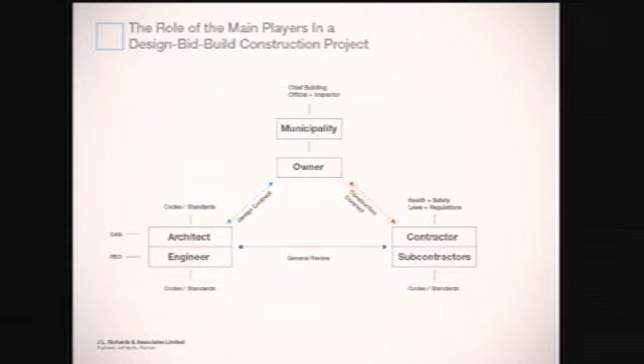Sorry. Yes, thank you. This is a depiction of the arrangement between the various parties on a construction project. We have at the center of everything the owner. This is the person that wishes to construct a project and has his own financing in place to build it.

He will consult with the municipality through the chief building officials and the building controls department to make sure that the zoning and the site plan control and building permit aspects of his application are in order and in compliance with the Ontario Building Code.

The owner will usually, in a project of this nature, contract with an architect, an engineer, or a group of engineers to prepare construction documents consisting of drawings and specifications to describe how the building needs to be built and the various qualities and installation methods for the materials.

The architect traditionally has been the prime consultant in this arrangement and responsible for the architectural design and coordination of the other engineering consultants and surveyors and planners that might be needed on a project. Architects are expected to operate in accordance with the guidelines and practices dictated by the Ontario Association of Architects, and engineers practice under the regulations and guidelines provided by the Professional Engineers of Ontario.

Once the drawings, or contract documents as they're referred to, are completed, the owner, or the architect on his behalf, will advertise for tenders from general contractors, or they will invite tenders from selected contractors that they are happy with and who have come recommended to them.

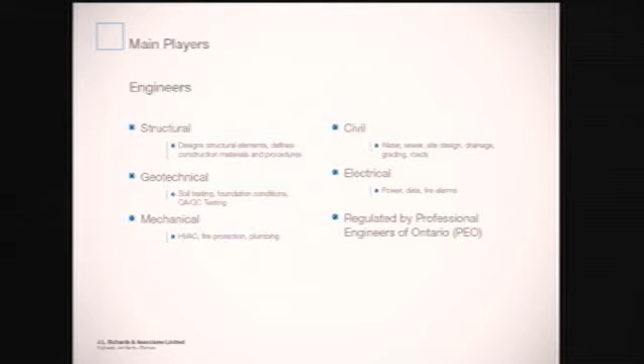You would retain a geotechnical engineer, usually on a project, to define where rock might be or what the founding conditions might be at the proposed foundation elevation, to define bearing pressures, provide lateral soil pressure factors and importance factors relative to seismic design. Usually this involves drilling or test pits to actually physically sample the soil. They will also be usually required to do some quality assurance, quality control, QA/QC, testing on various elements during the construction process.

You have mechanical engineers responsible for the heating, ventilating, and air conditioning systems, the fire protection, plumbing, building controls. You have electrical engineers for the power, lighting, data, fire alarm systems. Civil engineers will design the water and sewer services to the building, the drainage systems and the site grading and the roads and access to the local streets. And all of these professionals, if they're professional engineers, are regulated by the Professional Engineers of Ontario. Next, please.

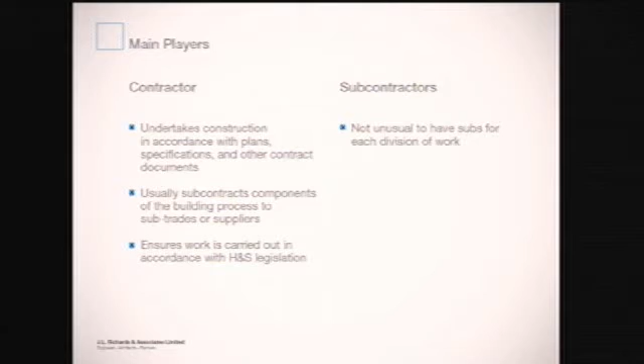Moving to the contractor. Contractor is in this case, in the traditional sense, a general contractor who undertakes the construction in accordance with the plans, the specifications, and other contract documents that he has actually signed a physical contract with the owner to perform. He will usually subcontract a great number of components of the building process to subtrades or suppliers, and is responsible essentially to act as a coordinator or integrator of all of these trades and suppliers into a whole, complete working building.

And it's very much a responsibility of the contractor, the general contractor, to ensure that the work is carried out in accordance with health and safety regulations. And his subcontractors, as I mentioned, can vary. Probably 15 or 16 different subcontractors on a large project, varying from painting, drywall, masonry, concrete forming, reinforcing steel placement, structural steel supply and fabrication.

Oh, I'm sorry. Get carried away. If you would bear in mind, Mr. Craig, that not only we have live transcription, but we also have translation, and that's true, in an area which is very technical, and I think you would be doing both these ladies a favor by just slowing down a bit, if you could do that, please. I will. Get carried away.

Various subtrades, such as concrete, reinforcing steel, structural steel supply, fabrication, erection, masonry, painting, roofing and waterproofing, electrical and mechanical, just all of the various pieces of a building that require specialty subtrades. Next, please.

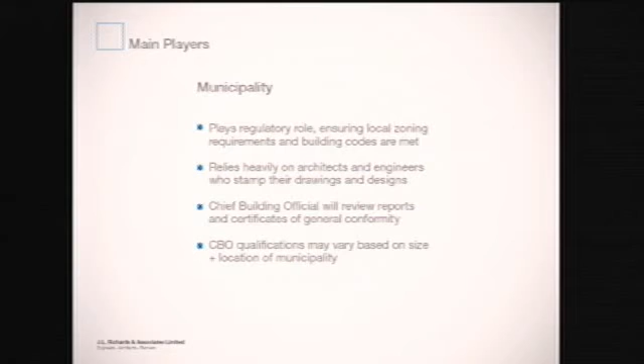The role of the municipality, again. Yes, the municipality plays a regulatory role under the Ontario Building Code. They ensure that the local zoning requirements and the building codes are met through the site plan control and building permit application process. The Building Controls Department usually relies quite heavily on the architects and the engineers who stamp their drawings and design and take professional responsibility for them meeting the applicable code.

The chief building official will review reports and certificates of general conformity which are provided by the professionals at the end of construction. And one thing to note is that chief building official qualifications may vary based on the size and the location of a municipality. It's not unusual for smaller or more remote municipalities to find it difficult to afford and attract professional engineers or architects to act in that capacity on their behalf, and hence they often don't have registered professionals on staff.

In that case, they can decide on their own whether they have the appropriate qualifications and feel comfortable with reviewing and approving the drawings, or engaging other professionals to assist them. Next, please.

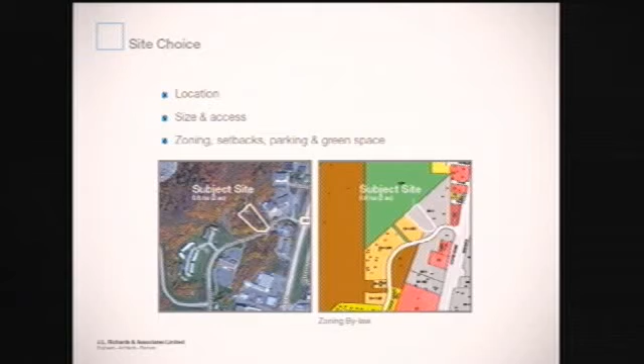The construction project itself begins with the choice of a site. It all comes down to location. An owner may have a piece of land that he wishes to develop a particular building on for whatever purpose, or he may have an idea for a building or a process that he wants to construct, and he will search for several sites. So it comes down to the location.

The size of the site will have a bearing on what sort of building is on it, and the access to the various services and roads and transportation networks if there's a product involved or deliveries to and from it. Each site has to be analyzed to determine what its zoning is, what the required setbacks are, the amount of parking that's required, the amount of green space, and the various things that are set out usually in the municipal ordinances and zoning bylaws. Next, please.

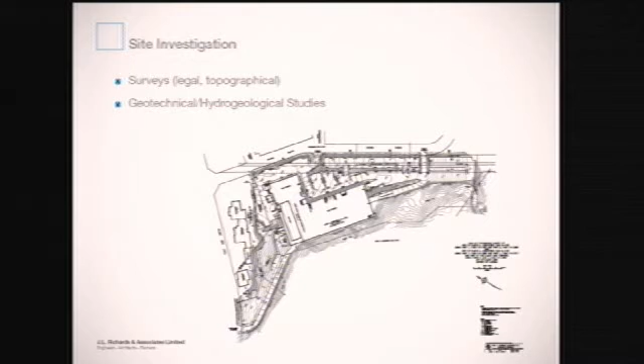Once the site is chosen, the next phase in the construction process is the site investigation. Usually it involves a legal survey to determine property boundaries and any impediments to that, any encroachments or any other liens or anything on the property that would render it unsuitable for the proposed construction project.

Then you would get into a topographical survey, which would define the various elevations and features on the site, so that the designers can appropriately provide grading, drainage, and foundation elevations suitably, and establish the floor elevations to suit the purpose of the building. Then you would move on to geotechnical studies to determine where the founding elements will bear, whether it's on soil or on rock, and if the rock varies, what the depth to the rock is.

He would work in consultation with the structural engineer to determine the structural engineer's preferred system of foundation and the various parameters such as allowable bearing capacity or depth of piles to found the building on. Sometimes you engage hydrogeological studies to determine groundwater levels, whether there's contaminant transport underground in the water table, or other features that a hydrogeological consultant might address.

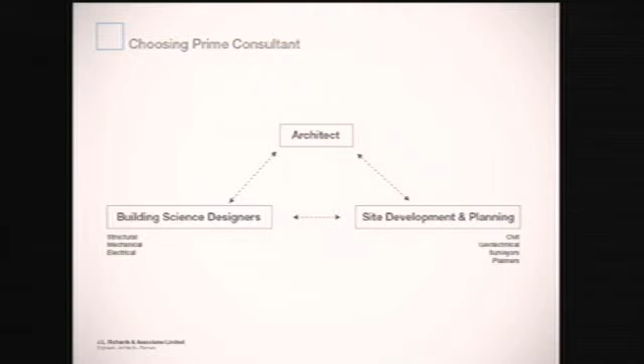We come back to the triangle with the architect acting as prime consultant. In this instance, the architect would engage what we term now as building science designers. The three major disciplines are structural, mechanical, and electrical. Structural engineer for the building frame and how loads are carried and the building is structured. Mechanical and electrical, as described, for the HVAC, plumbing systems, and the various electrical, power, and lighting systems.

On the site side, the site development and planning might involve civil engineers, or municipal engineers as they're sometimes referred to, geotechnical engineers, surveyors, and planners.

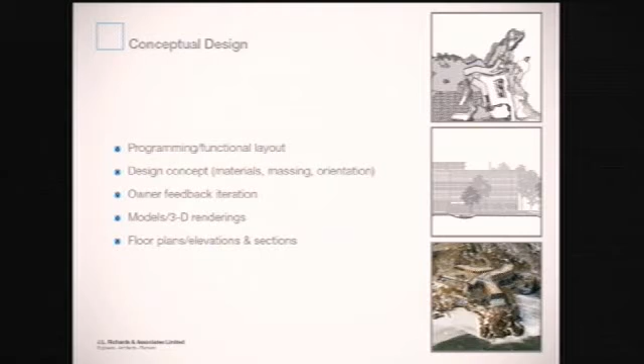The design process begins with what we term the conceptual design. The architect comes up with a programming and functional layout for the building, a design concept with which he will select and recommend to the owner various materials, massing of the building, floor-to-floor heights, actual dimensions, and orientation on the site. This will be discussed in detail with the owner and preliminary budget estimates made. Usually there's one or two, maybe more concepts developed at this stage.

They might include a model of the building or a 3D rendering. In the older days, back in the 70s and 80s, it would probably be a hand-drawn perspective of the building from various orientation points. So this is the first phase in the conceptual design—now you have the design team together to come up with a conceptual design.

There's one shown on the right side of this page. Since we had them handy, those are some conceptual drawings and a model of the Living with Lakes building that our firm did in Sudbury at Laurentian University. It was an award-winning project, so we're proud of it.

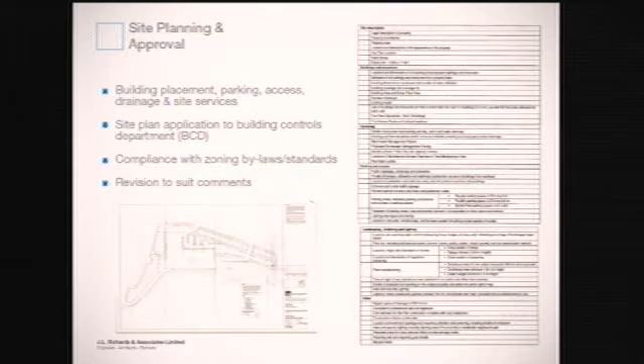Then you're moving on to site planning and approval. This process involves making sure a site plan drawing is prepared, which shows the building placement, parking, access, drainage, and site services. A site plan application to the Building Controls Department is made on behalf of the owner, with the owner's full knowledge, and it's reviewed for compliance with zoning bylaws and standards in effect at the time. As the Building Controls Department finds differences from their local bylaws or the building code, they'll mention these to the design team, and there will be appropriate revisions. On the right is a typical building site plan control checklist from a municipality indicating the various aspects that need to be ensured as being submitted and meeting requirements.

So once you've arrived at the concept design, what's the next phase? Site plan approval—we've done the conceptual design, submitted for site plan control approval, and now you move into the detailed design.

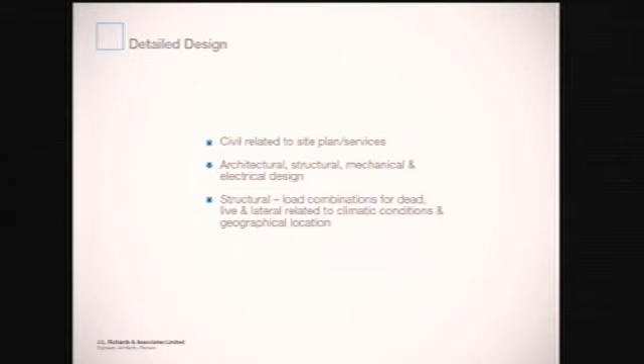The detailed design would involve civil engineering and municipal engineering for the site plan and services - the roads, grading, parking, and stormwater management, which is certainly an important aspect these days. The engineers and architect would design their various systems. The architect handles all the building finishes and building envelope.

Materials and selection systems. The structural engineers address the structure itself, and the mechanical electrical design for the various systems described earlier. The structural engineer has to pay attention to various prescribed load combinations for the dead load, the live load, and related climatic conditions and geographical location, which are prescribed in the code.

And loads will be a subject we'll hear evidence about through the course of this. In terms of how you arrive at these loads, let's move to the next slide for illustration.

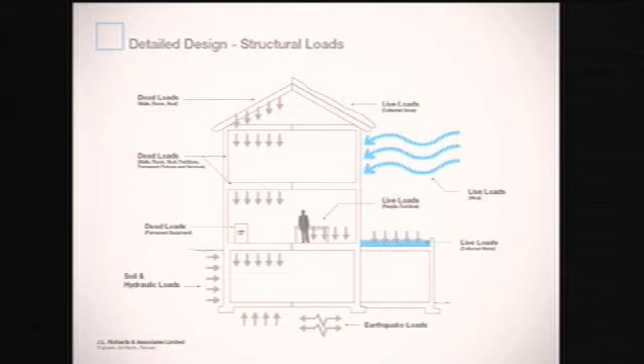This is a pictorial indication of some of the nature of the loads. You have dead loads from the walls, the floors, and the roof of the building itself. You also have permanent partitions and fixtures and services that are embedded or permanently attached to the structure, and the structural engineer will estimate the amount of that weight or load on the structure. You have permanent equipment that will exert heavier loads in certain areas that have to be taken into account.

At the foundation level, you will have soil and hydraulic loads - water pressure on basement walls if they're not drained, or you just can't drain them effectively - and the soil itself exerts lateral pressure on the wall.

In terms of live loads, you have those such as snow, which in the Northern Ontario area we know all about. Live loads from wind exert lateral pressure on the walls and roof, and uplift in some cases depending on the nature of the wind. You might have loads for collected water, unintentional collected water on a roof, or a swimming pool that's built in.

And you have lateral loads related to earthquake, although in Northern Ontario in general that's of lesser concern because it's a lower seismic activity area. Then you have live loads from people and movable furniture.

By what route do you arrive at what the wind loads and snow loads are? Where do you get that information? The Ontario Building Code is very good for this.

In both the 1975 and 2006 editions, there is a complete list of climatic conditions and wind pressures, earthquake and seismic factors, snow loads, ground snow loads, and then the design portion of the code, Part 4, dictates to the structural engineer how he uses these loads and the factors he works into his load combinations.

During contract administration, there is review of quality assurance and quality control by the design team, either through an agent or personally. There would be a testing program for various materials — concrete, and sometimes sections of structural steel are tested to make sure they have the proper yield strength. You might have an inspection of the roofing process to make sure it's applied correctly. It's a unique science in many respects. The designers would set out in their specifications which materials need testing, the nature of the testing, and the codes to which the tests must comply. There's a professional obligation to ensure general compliance or conformity with the design documents, and this general review process is required by the Ontario Building Code.

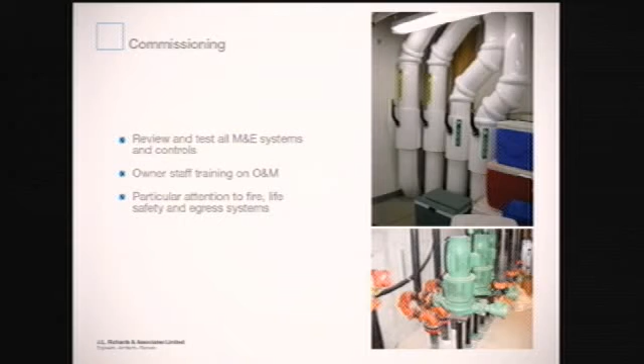As you move towards the end of the construction process, you move into what we term the commissioning phase. It's generally focused to a large extent on the review of the mechanical and electrical systems and their controls, to make sure they're operating correctly and will provide power, heat, light, and comfort to the occupants. Usually the commissioning process involves owner and staff training and the provision of operations and maintenance manuals to guide future maintenance of the building. There's also particular attention paid to fire and life safety and egress systems at this time.

Is the commissioning done before or after substantial completion? It's usually done just before substantial completion. It's usually one of the elements the designer would want to have in his pocket, to make sure the air systems are balanced properly and all the equipment is working, because one of the tenets of substantial performance is that the building is suitable for its intended use and purpose. So it's most designers' position that unless all of the life safety and occupant comfort systems are working properly, it's not ready for its intended use.

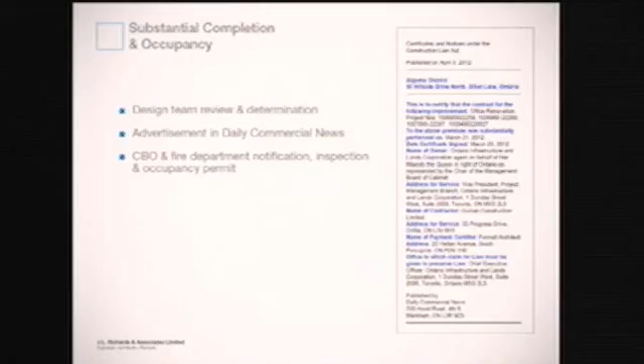At substantial completion, or substantial performance as it's now referred to, the design team will inspect the building thoroughly to determine what deficiencies there are and how much is left to be done, and make their professional determination as to whether the building is ready to be accepted as substantially performed.

If it is, there's a requirement in the Construction Lien Act to advertise this substantial performance in the Daily Commercial News, so that any suppliers or subcontractors who might have lien rights know when they expire, and that they have to get their claims in before the expiry of that date.

Following that, the Building Controls Department, or the Chief Building Official, and the Fire Department would be notified that the building is ready for occupancy in the opinion of the contractor and the professionals, and they would inspect the facility, determine whether it meets the requirements that they've laid out, and if it does, they'll issue an occupancy permit. If it doesn't, corrective measures are taken.

Thank you. On the right is a certificate of substantial completion that you mentioned, typically published. Yes. So Quinnen Construction was not any part of the construction of the mall? Absolutely not. This is typical. This is a public record that we just pulled off of the Daily Commercial News. It just happened to be one in Elliot Lake. Thank you.

That signifies really the end of the building construction and commissioning and turnover process. The owner now takes responsibility for the building and for its ongoing maintenance and review. There's normal maintenance required on all building systems. Some are more cogent than others. The architectural and the structural systems, in my opinion, their maintenance, although it's important, is often ignored until problems occur.

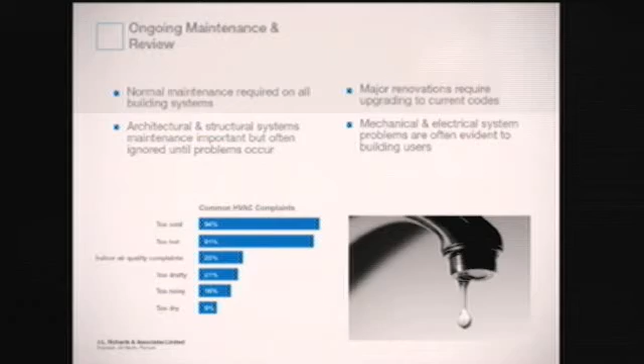You don't pay attention to your roof until it leaks. You don't think about the caulking until you've got a seepage around a window. You don't think about a structural problem until something deflects or breaks or moves, or you feel some vibration and some undue stress. So it's the old adage of out of sight, out of mind in many respects.

There's a note here that major renovations require upgrading to current codes. If there's a significant renovation to an existing building that was designed under a previous code, that portion, or if it's extensive enough, all of the building must be upgraded to current code requirements.

But the big reason that mechanical and electrical systems receive most of the maintenance and repair attention is simply because they affect users. They're obvious to the building users. If you don't have enough heat, or if you've got no power, or the toilet doesn't flush, somebody gets upset, there's a complaint, and usually the building maintenance is taken care of. Next, please.

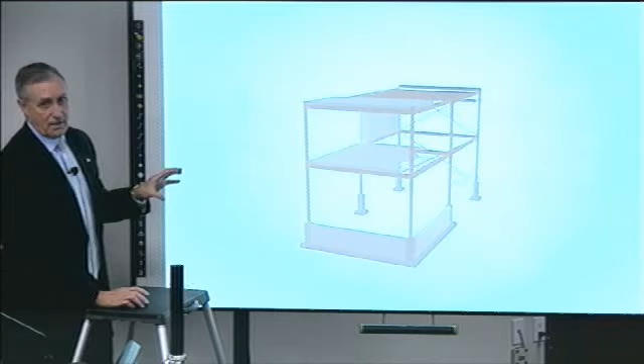Mr. Commissioner, I think Mr. Craig's now set up to show the structural elements and the graphic. Thank you. Am I live here? Okay. This is an interactive graphic model that we have prepared just to illustrate the various components of a typical structural steel frame construction. It's not the Algo Centre Mall by any means, but I will just go through and show you some of the various terminology and members that we use in the structural engineering profession.

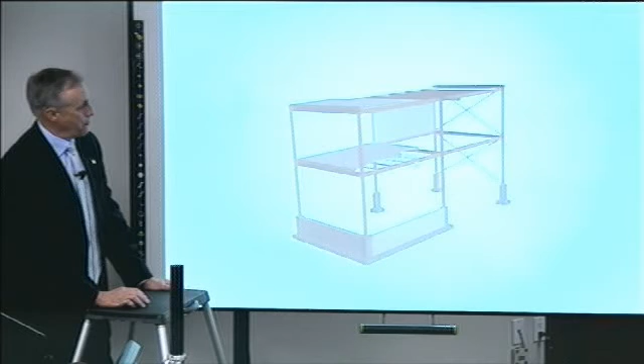This is, in its entirety, a structural steel frame. These are reinforced concrete piers with spread footings.

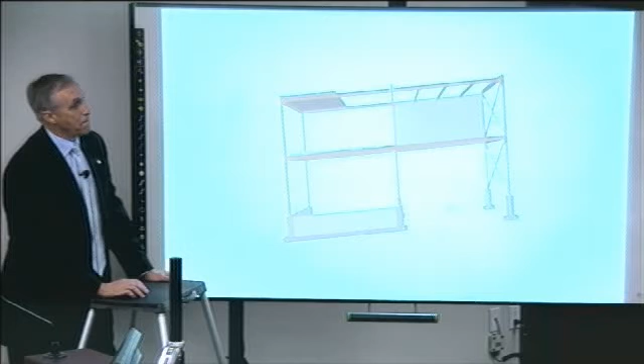Can I just interrupt you for a moment? I'm sorry, Mr. Craig. I'm not seeing the transcript being produced on my screen. I don't know if it's the same for everybody else. Have a look now. Is everybody else getting the transcript live, or is it just yourself? It is coming through here, yeah. Okay, let me try again, sorry.

No. Still with it. If everybody else is getting it, that's fine. It's not the end of the world for me, but I thought it might be a general problem. Go ahead then, please. Sorry, Mr.

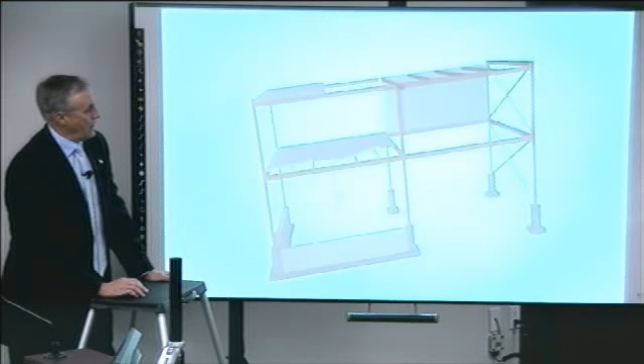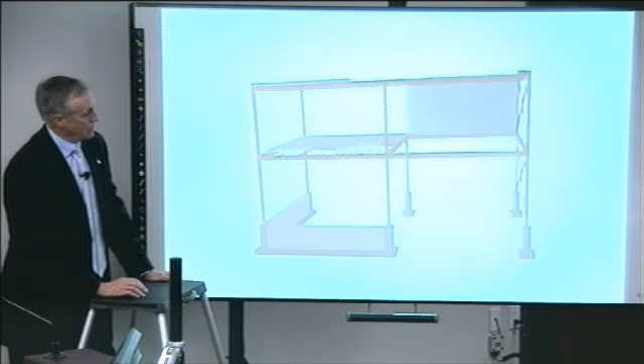Craig. No problem. We have many components in a structural system. The horizontal load-carrying members are called beams. The vertical load-carrying members are called columns. The area where they connect to one another is a connection.

Some of the horizontal load-carrying members, the secondary members, can be open web steel joists, which are lighter, more slender members, similar to the wood joists in a floor, which span between major walls or beams. And they consist of a top and bottom chord, C-H-O-R-D, interconnected by a steel rod sloped series of web members.

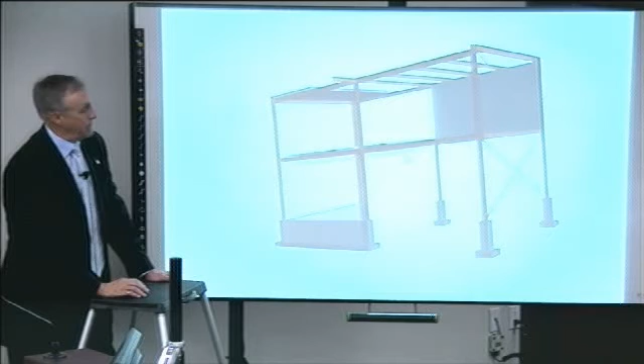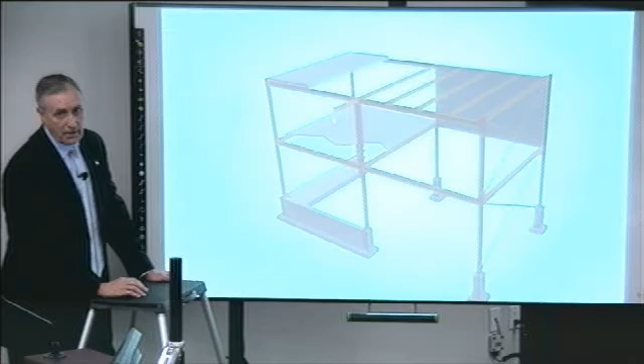Secondary load-carrying members can also be lighter steel beams spanning to other beams, or in this case, directly to a column. This beam is what we call a cantilevered beam. It extends across its support at the column and cantilevers out, so it doesn't need any other exterior support because it's stabilized by the weight and the connection of the beam in the main span.

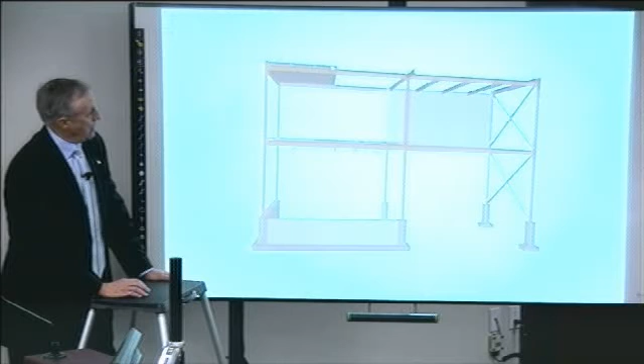This is a depiction of hollow core pre-stressed concrete slabs. See if I can rotate it a bit, but you can see the ends of the slabs. They come in 4-foot sections, and they're any given length, and the depth of them in some instances goes 8, 10, or 12 inches, and sometimes even more. And the significance of those is there's no dispute. These slabs were used.

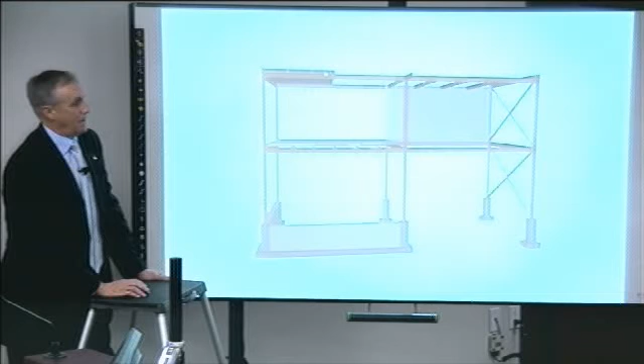These slabs were used at the Algo Centre Mall, and they constituted the platform which sat on the structural steel frame at the roof parking level. Those are manufactured in a pre-stressed concrete manufacturing plant and prepared and delivered to the site and erected.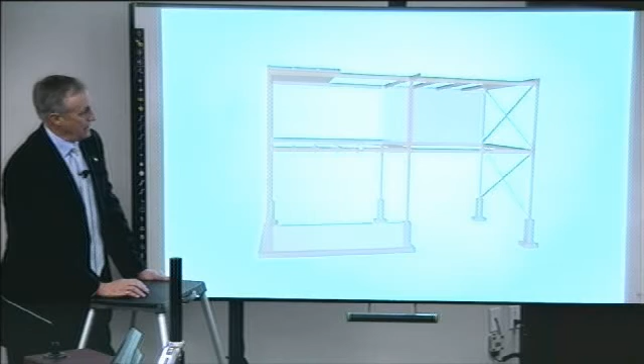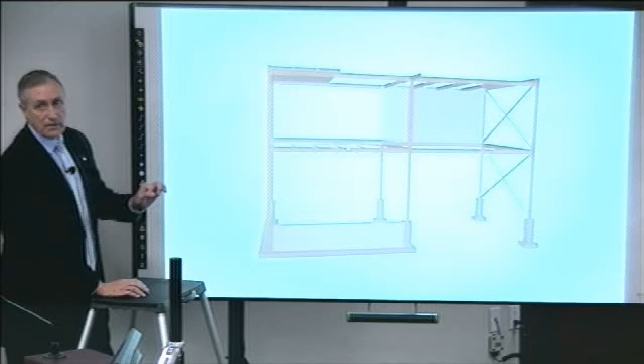Sometimes joists will support a thin concrete slab that's placed on a form or a V-pan, we call it, and a 2.5 or 3 inch or more topping of concrete with some welded wire fabric, which is light reinforcing in a square pattern installed in the slab.

These diagonal members are typical cross bracing to prevent the frame from swaying under lateral load, wind, or earthquake. This is an infill wall you'll hear referred to. And those, I guess, are the various significant elements of a steel frame.

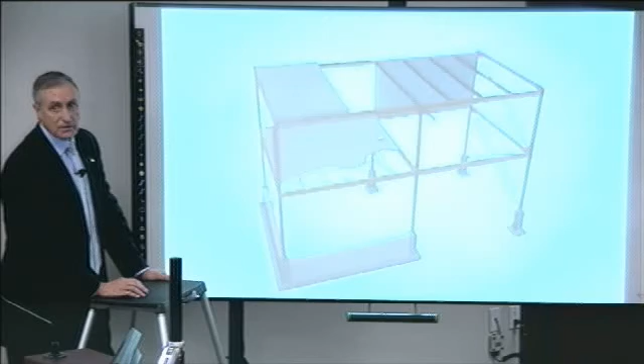Now, I think you have a mock-up of an example of a connection. I wonder if we start off by saying it's not to scale. No, it isn't. It's for illustrative purposes only. We couldn't have lifted anything of this nature if it was done in structural steel. So we used fiber reinforced plastic members, and they aren't to the scale that we've referred to in this project.

This is a column, again, a vertical member supporting a load. This is the column web, the central part, and it has two flanges, column flanges. This is a beam that's connected to the column through two clip angles, and the beam has a web again, and a top. This is the beam top flange, the beam bottom flange, just by virtue of its orientation.

It's very common that all of the members are fabricated in a shop to a set of shop drawings that are based on the design drawings that the structural engineer prepares. And the connection design, in this case, consists of a pair of clip angles that, in the case of the Algo Centre Mall, were welded in certain instances to the face of the column flange.

These are out of scale, of course. They would terminate here and have a weld running the length of them and up and across the top. And the pair of angles would be on the column when it's erected on the site. Then this beam would be brought in, dropped in place between the angles, and bolted in place with high-strength bolts. And that's what transfers the load on the beam to the column.

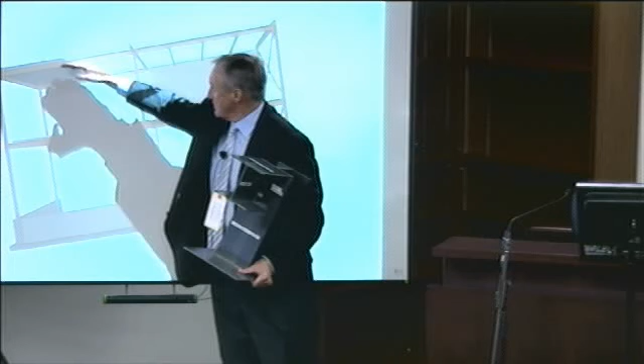That's correct. That connection. Any loads that happen on this span, such as the load from the slabs or the joists, is carried by the beam to the column and transferred into the column through this connection.

And that's the connection. Can you read that exhibit number for me? Oh, yes. Is it 01894? Thank you, exhibit 1894.

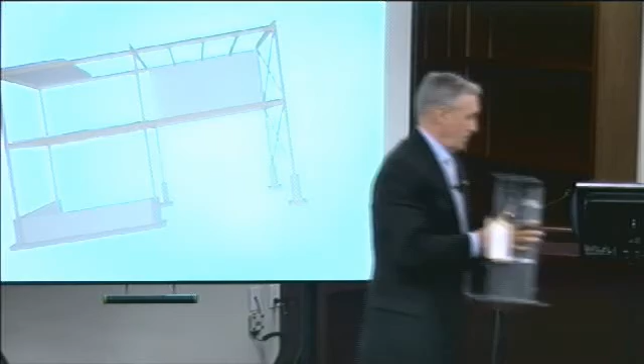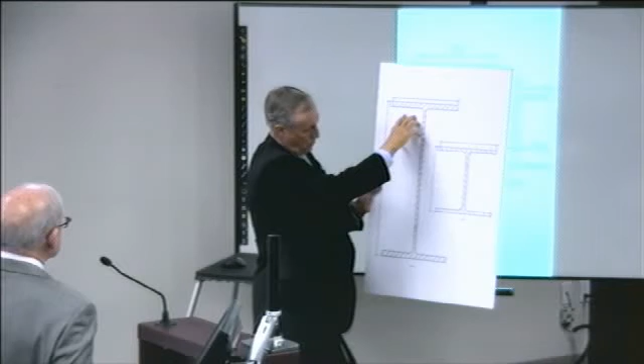Now, you mentioned in your description that these are not to actual size, but I understand you have a graphic illustration of their relative sizes versus the beam and the typical column. The beams in the floor or in the roof framing of the Algo Centre Mall were wide flange, 24-inch deep, wide flange. This is to scale. It's 24 inches deep, and it's 12 inches wide, or the width of the flange is 12 inches.

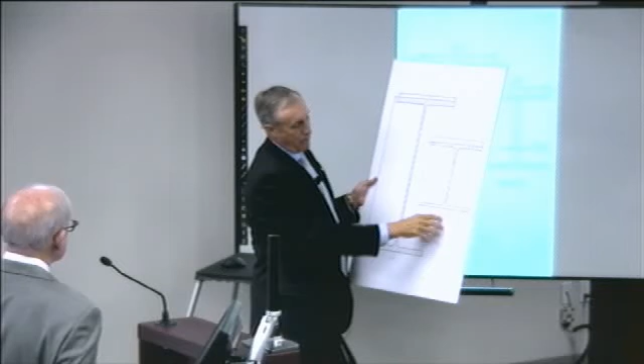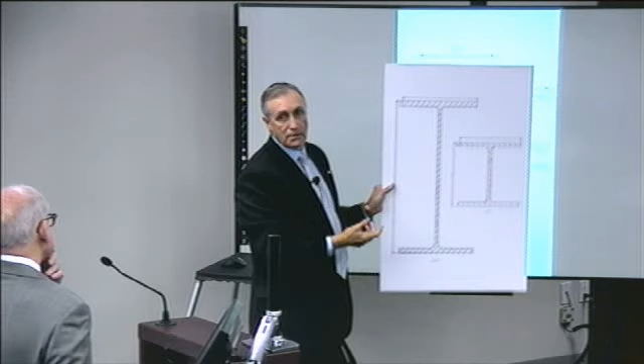This is the actual size of the column that it was connected to. It's called a W10 by 49. It's 10 inches deep, just under 10 inches deep, and 10 inches wide across the flange. It's virtually a square section. These are all hot rolled structural sections that are produced in a structural steel mill.

So that gives you the sense, Mr. Commissioner, of the actual size of these, and why we didn't carry them in here today. This column here would have been 10 inches this way and 10 inches that way, and this beam would have been 24 inches, so it would have been this high if it was sitting on the desk.

Okay. Was that made an exhibit? I believe, sorry, it's Howard. Exhibit 1893. Thank you.

Now, could we bring up exhibit 14? What we're looking at there is the roofing system, the so-called Peterson roofing system, which is alleged to have been installed on the roof of the building. I don't think there's much doubt about that at this point, but to avoid any contentious points, all we'd like you to do, Mr. Craig, is simply translate for the public and for the lawyers what the roof system consisted of. This is what was, we understand, there when the building was built in 1979-80.

This is a sketch from the Peterson proposal to the owner, indicating what is believed to have been the system as it was installed. It consists in the middle of the 8-inch pre-stressed hollow core slabs. On the underside, it's 3-inch thick thermofiber insulation with a foil facing. So the wavy line at the bottom is insulation here, across here. And it looks like they're indicating mechanical attachment of the insulation to the underside of these concrete slabs. These are the grouted joints at longitudinal joints between adjacent 4-foot wide panels.

And this is indicated as a 3-inch durable concrete composite wearing slab, which is concrete placed on top of the hollow core slabs and intended to be bonded to them. And the dotted line with the X's indicates what's termed as welded wire fabric, which is a light drawn steel square grid of reinforcing. Would it be placed in poured concrete? This is placed on site, yes. The slabs would have been in place, prepared as needed to ensure that you got the bond of the concrete topping to them, and then this concrete would have been placed, and it was a variable thickness, according to what I've been advised, to provide some drainage at the top surface.

This is indicated as a barrier penetrating concrete sealant. This is an Isoflex sealant in the crack control system. These were intended to be tooled joints in the concrete just before it hardens to try and encourage cracking in a controlled pattern along these joints, and then filled with a sealant later. And as I mentioned, the barrier sealant was to be put on top of it.

You mentioned bonding between the core slab and the upper layer. Yes. How's that bonding achieved, sir? There are various ways to do it. I don't know what this specification was, Mr. Commissioner. Sometimes you would brush the slab, clean the base slab well. If it was properly roughened, we would dampen it to make sure that it didn't suck the water out of the fresh concrete too quickly and impair the bond.

And you can use a mortar slurry, paste, to brush into the slab to help bond the new concrete to it. Or there are various chemical products such as latex additives or epoxy bonding agents. I don't know what was intended or what was used here, but there's a definite process to make sure that you get a proper bond of the fresh concrete to this hardened pre-placed concrete.

And the lower third, which is the insulation. The insulation material, that's added on after? Yes. Is it sprayed on, or is it? No, this apparently is a rigid foil-faced insulation board, 3 inches thick, that would appear to be rigid fiberglass or something like that.

I honestly don't know what this thermofiber is, but it sounds like a fiber product that has a glossy foil facing, probably intended to act both as a vapor barrier and a heat rejection to help its heat properties. And that would be actually cut and fit to the underside and attached. After the core slab's been installed?

That's correct. And usually well down in the process, once the building is completely waterproofed and sealed, because you don't want unintentional leakage getting through and damaging the insulation. Thank you.

Thank you, Mr. Craig. Subject to your wishes, Mr. Commissioner, those are my questions, and there may be some questions from the floor. All right. Anybody have any questions of Mr. Craig? Would you like me to take a short break as you consider whether or not or how to formulate your questions? Mr. Longo, you're indicating yes? I'd like to, yes. All right, well, let's unusually take our morning break at this point, and then we'll hear from you after that.

Order, all rise. À l'ordre, veuillez vous lever. This hearing will recess for 20 minutes. L'audience reprendra dans 20 minutes.

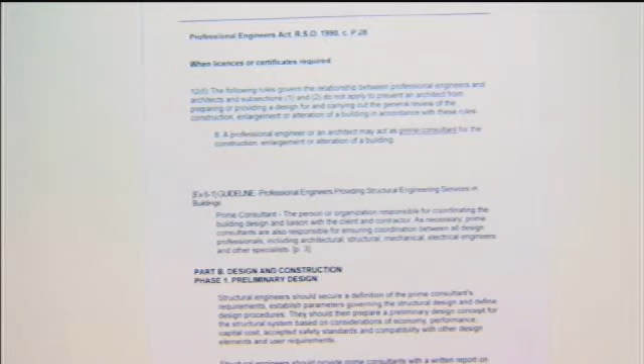Okay. All right. I do, if you notice on the screen that's in front of you, give an extract of Exhibit 6.1, which is your professional engineer's guideline dealing with structural engineering services, and it gives a definition of prime consultant. Is that, in your view, an accurate description of a prime consultant?

I believe that's the role that I was describing to you, yes? Thank you. And if I could go back to the first sheet.

I take it, sir, in your experience, you've had to deal with the Building Code and the Building Code Act. Yes, I have. Would you agree with me that the term prime consultant is not found in either the Building Code Act or the Building Code itself? Without doing a complete search of the Act, I wouldn't want to make that statement.

Would it be fair to say, in your experience, if one were to try to find the role and responsibility of a prime consultant in the Building Code Act and the Building Code, they'd come up short, or that might not be where I would guess to search? I would guess that to be the case, yes. All right, thank you.

I appreciate that. In your view, I know you haven't been qualified as an expert yet, but Mr. Carter said you're highly qualified, so I'll ask: would you agree that those two thick volumes of the Building Code 2006 on the bookshelf there, amongst its terms, it might be useful if somewhere in the code a description was given of a prime consultant, describing the duties, obligations and role of such a person, if that definition isn't there now? I think it would be useful, yes, in my opinion.

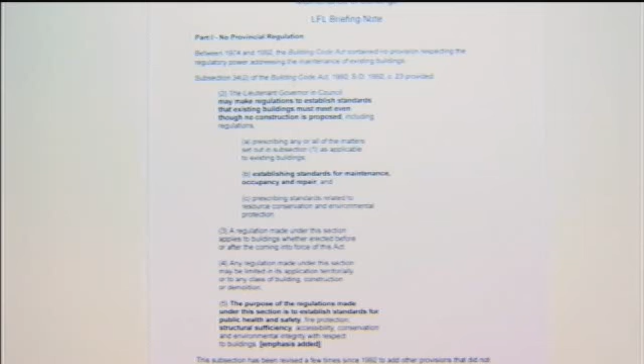That's correct. All right, and sir, I have an extract from the Building Code Act, which isn't part of Exhibit 6. You're familiar with Section 34, Sub 1 of the Building Code, which is the regulation power for the building code itself, and explains all the things that can be in a code. What I'm showing on the screen is Section 34, Sub 2 of the Building Code, which was only introduced in 1992 with the new Building Code.

That section says the Lieutenant Governor in Council may make regulations to establish standards that existing buildings must meet, even though no construction is proposed, including regulations, sub B, establishing standards for maintenance, occupancy, and repair. And sir, you'll see in subclause 3 that a regulation made under this section can apply to buildings whether erected before or after the coming into force of this act. And then you see the purpose of the regulation under subsection 5.

Sir, to my knowledge, the province has never exercised its power and actually made a regulation under subsection 34.2 dealing with the maintenance of buildings. Is that your understanding as well? That would be my understanding. I could not state for certain because I'm not aware, but that would be my understanding, yes.

All right, and sir, in your practice over the years, have you ever mused as to whether it would be useful if there was a building maintenance standard that had been issued by the province?

Generally, we've experienced the situation where the municipality itself has enacted property standards which deal with the maintenance and safety of buildings and maintaining the condition of the buildings. So we really don't postulate as to whether the province should get into that process or not, so I can't give you a definitive answer on that.

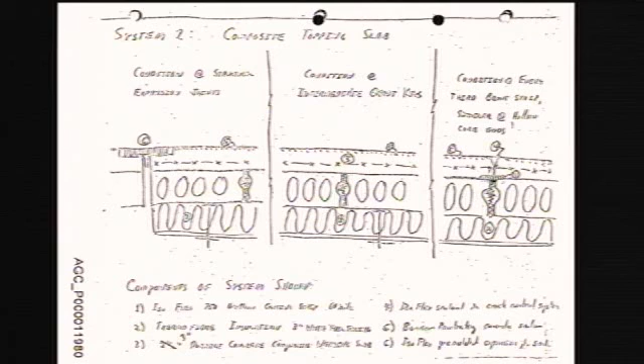I see the top layer is the topping, the middle layer is the concrete slab, the bottom wavy layer is the insulation, is that correct? That's correct. Where's the beam? It's not shown. Whereabouts should it be? Well, it would be either in the distance beyond where this section is cut, or on this side of it. The top of the beam, or the top of the slab flange, would be behind this. It would interrupt the insulation, because the beam would span this way, and the cores in the slabs indicate the slabs are spanning perpendicular to the page. So the model I showed indicated the slabs are supported on one end by a beam and on another end by a beam, and this is a section cut through that slab system in between. Thank you very much, that explains it exactly.

Okay, thank you, those are my questions. Mr. Kearns?